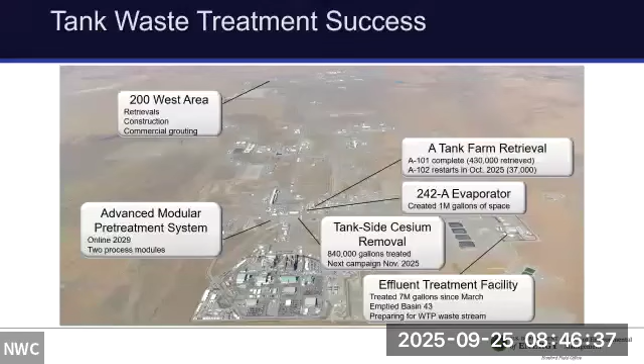So we started H2C, we started our contract in February of this year. Just to say who we are, we're comprised of three companies, BWXT, Amentum, and Fluor, with teaming small businesses of Longenecker and Associates, DBD, Intera, and a company called DSS Plus, which is a chemical management and chemical safety company. We've gotten off to a great start over the past 7 months.

Before I go further, I just want to say I've kind of swooped in here at the nth hour and get to be part of this great Hanford set of projects, being part of making the first transfer to the WTP plant and watching it start up. But my colleagues on the panel have been working at this for many years, and I'm just pleased to be part of it and see these great achievements come to pass. I think entering the next phase is a bit of an understatement.

I mentioned this yesterday, it's really, really history in the making, and it's just something that we all should be quite proud of. H2C's vision is to solve the Department of Energy's largest environmental challenge in order to create a positive legacy for future generations, primarily future generations within the Tri-Cities, our local community, which has been part of this evolution of Hanford for many decades. So we as H2C are extremely proud to be a part of it.

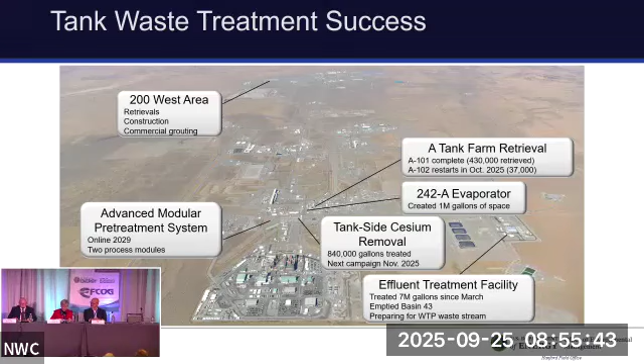Next slide, please. I want to talk a minute about our company values. In order to enable the nuclear culture for continuous operation, we've established what we call a values-based organization. That values-based organization tees off of 6 values that we hold near and dear, that we are growing organically through the organization and also institutionalizing throughout our various processes, performance management, training, et cetera.

Our 6 values are to live safely 24/7, own it, which is about accountability, commit to the mission, which is about why we're all here and what the government pays us to do, make it better, make something better every day, big or small, listen first, listen to our colleagues and our employees, and sometimes that's hard to do, but it's critical to the kind of culture we want. And lastly, to act with integrity.

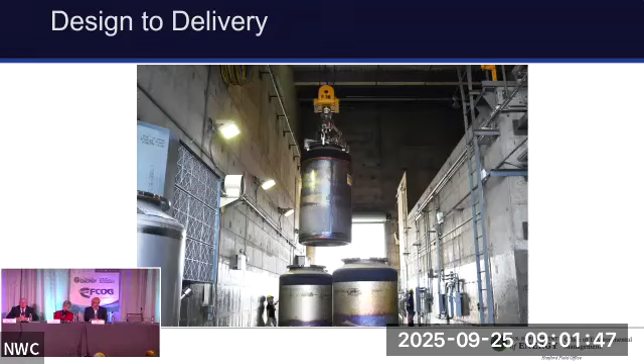So things we're talking about, you heard Carol mention safety. Well, safety is paramount to us, and construction is a very risky industry with our craft working in jobs that are very physical and dealing with equipment interfacing, picking, lifting, and rigging. So safety is paramount to us in how we execute our work and meet our goal of zero accidents, ensuring that our workers go home in better condition than when they came to work. That's something we're really striving to achieve.

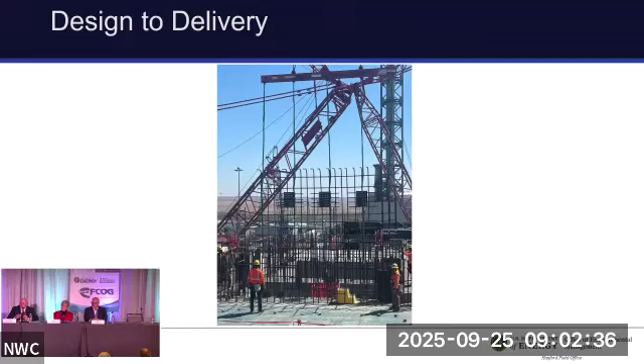We're also working hard to further accelerate the schedule and reduce costs. Our goal is to complete the design in early 2027, be underway with what we consider long lead or critical procurements, and then weather in the facility, which involves installing concrete at the upper elevations. You'll see rebar going in on the high-level waste facility at the upper elevations, installing the concrete, and if you look at the next slide, you'll see what we call an over-the-top piece of equipment.

A lot of that equipment was purchased in the early 2000s. It's been in storage, and we've been working on getting it installed in the facility. With over-the-top construction, we'll place concrete over that, and we have about 6,000 plus tons of steel to install, and then we'll cover and weather in the facility, all with that goal of early 2027.

So let me talk a little bit about how we're executing that. What we're really trying to do is what we call a new approach to HLW, and that is to reduce the cost of this facility and make it affordable for our customer, the Department of Energy, and the U.S. public. And how are we doing that?

Well, the key to that is the best way to reduce costs, and there are lots of factors, but when we're in what we call phase 2 of the project—construction, startup testing, and commissioning—every day you can reduce that saves a significant amount of money by reducing the hotel load. So we're really focused on how best to go about doing that.

So first off, we've shifted from a design-build approach to a design-then-build approach. Now that doesn't sound like much, but design-build is what we do very well on an LNG project where we're constructing very similar designs over and over, going from about 20% design to breaking ground, and then hitting substantial completion in about 50 months, with LNG coming out the back end of the plant. But this plant is much more complex than that.

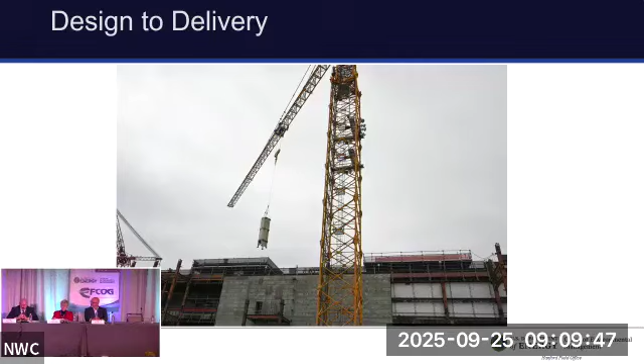So things are going well at HLW, and we really look forward to those proceeding. And with that, I will turn it over to Mark, who will talk about the lab.

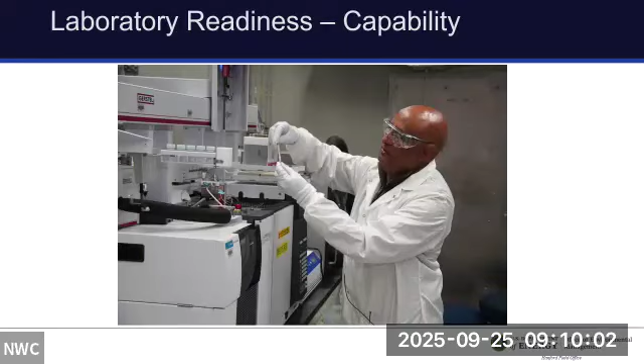I'm delighted to be here today to talk about the significant contributions of the 222-S laboratory to the mission at Hanford and how we got here. Starting out with a discussion about our company: Navarro-ATL is an unincorporated LLC formed by two businesses, Navarro Research and Engineering and Advanced Technologies and Laboratories International.

Our job as the primary contractor at 222-S Laboratories is to provide analysis of highly radioactive samples for the Hanford mission. You've heard a lot this morning about the exciting time we're in here at Hanford, and it is an exciting time. We're all anxiously awaiting the next step. We've had a critical and crucial role at the labs in getting us here, and I'm going to talk about that today.

I want to express what we're doing to prepare for the long-term scope and mission at Hanford. The 222-S lab provides laboratory analysis for the waste feed going to the waste treatment plant from tank farms. We also provide analysis for waste samples before and after tank retrievals, and for tank operation samples to ensure tank operations are safe and can be performed long-term.

We work very, very closely with DOE and Carol's team. We have to be in lockstep with Carol's team to make sure that what they need from us, we can provide, and we do that on a daily basis. We also work with all the other Hanford contractors to make sure we have what we need to get the job done, and we'll talk about that this morning.

It's an old facility, the Hanford 222-S laboratory. It's 75 years old. In fact, we'll be celebrating our 75th anniversary next year and making a big deal out of that. We've been out there a long time, but the labs need some work, as you might imagine—upgrades and renovations. We've been doing that. It is a Hazard Category 2 nuclear facility, so we need to make sure we maintain that level of rigor moving forward.

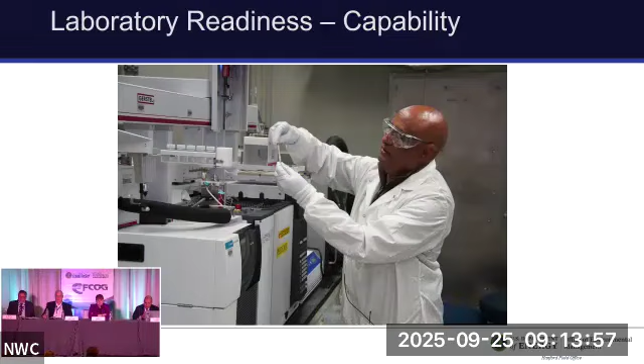Moving on to capacity, DOE is investing in the modernization of the laboratory. What you see in that photo is a laboratory that's been remodeled. If we had a before picture, you'd be amazed by that photo. We're really doing a great job there. As I mentioned, the lab is 75 years old, and not a lot of renovation or upgrades have been done over the years. So we're taking that challenge on head on, and we're proud of that.

In 2024, we completed a major hot cell window replacement. That was a huge project for us. We self-performed that, did it under budget and on schedule, with no contaminations and no injuries.

It's really important also to the mission to make sure we're ready for what's coming next. We're repurposing hot cells to expand our storage for tank samples and continuing to replace life systems as we move forward. As far as reliability, we're essentially de-risking the infrastructure to ensure 24/7 operations.

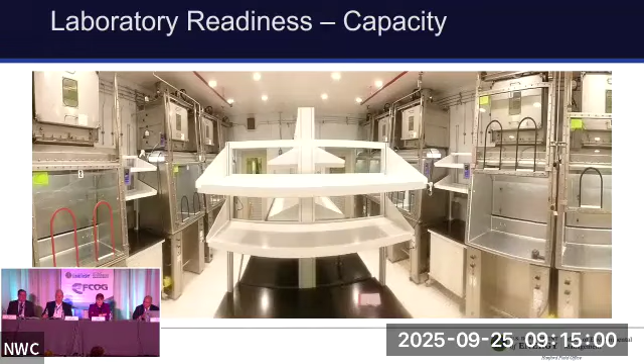This picture shows us using one of the more than 30 instruments we've upgraded and replaced in the lab so far. This is the X-ray diffraction instrument, which allows us to study the physical properties of samples we receive in a way we haven't been able to before. We have a lot of these new state-of-the-art instruments we're introducing to the lab.

By doing this, we've ensured proficiency test accuracy and decreased analysis time. Right now we're hitting a 98% average proficiency test accuracy, and if you're familiar with lab work, 98% is pretty good. We're pretty proud of that, and we're going to continue working to make that even better.

This means staying on top of our preventive maintenance and corrective maintenance as well. As you might imagine, keeping an old lab running is a tough thing to do, but we're making that work. We've reduced our corrective maintenance backlog by two-thirds over the past year, and for the 8th week in a row, our PM backlog is at zero. The importance of that is we've got to make sure this lab stays in great working order for now and in the future.

We can't do this alone. For many of our systems, like water systems and fire systems that we're having to upgrade, we rely on Amy's team quite a bit to help us with that, and she's been tremendous in providing that support. Some of our systems overlap with Bob's area of responsibility, so we have to work with his team to make sure we can access those systems and get those upgrades done. As you've heard throughout, this is a team effort by all of us, working hard to make sure we're ready for what's next.

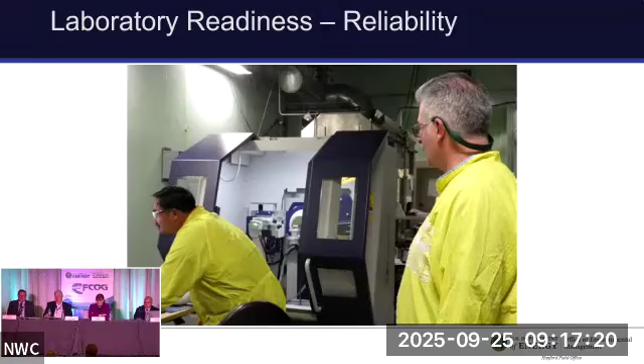So we like to say we're building the lab of the future. Stay tuned and you'll hear more about that. And with that, I'll turn it over to Bob.

All right, thanks, Mark. I'd just like to note up here that this end of the table was the bald side of the table. Carol, apparently you got a new haircut you got to get, right? Mark and I came this morning with a fresh haircut, ready for this event. Or I got to change my name to Johnson. I don't know what it's going to be, but Carol recommends Johnson maybe. I don't know.

So as Mark mentioned earlier, we are the back end of the process for everything associated with vitrification activities. I call it hot potato. We'll take the canisters when they come over to us, receive them up on the upper platform area, let them sit and cool off until they're no longer a hot potato, and then we'll move them down into our final storage resting location for the foreseeable future, until the final destination is determined at some point later on, way later in the future.

So for us, it's right at the final throes at the end of the campaign. We've been ready for about the last 9 months to receive those, interacting with mock-ups with Mark's team to make sure everything transitions easily as they come out of his area once completed, and we're geared up and excited to get started. It's been a long time coming for all of us. Mark started here in '93, I think I started in '92, so we came out around the same time. Both of us had hair then, neither one of us do now.

Yesterday we had a panel up here, and I mentioned this is a next phase of Hanford. Although this is a massive step associated with tank waste, we are still doing massive things in other areas. One area we're responsible for, and just now getting to the precipice of, is going through our second readiness review with the Department of Energy's approval for starting up cesium strontium capsules.

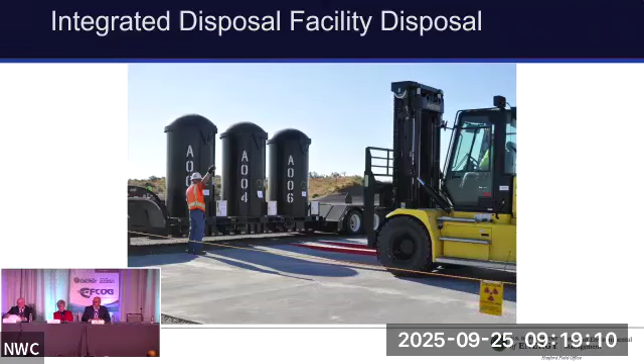We are planning to start loading cesium capsules as early as right around the Halloween time period, and for the better part of the next 2 years after that, we'll be removing all of the cesium capsules currently in wet storage up to a dry storage location. As Ray mentioned yesterday, I think 60% of all the cesium on the Hanford site resides in those capsules, so they are a significant risk.

On top of that risk, once we complete the cesium campaign, we have some strontium capsules we'll move out either to dry storage, or there's some commercial interest in that, should DOD and DOE decide to move forward. In about a 2.5-year time frame, that will free the facility up to start the longer term D&D part of the campaign for the Canyon facility, allowing us to start offloading the current costs of managing a facility of that nature, about a $30 million price tag per year that we would free up.

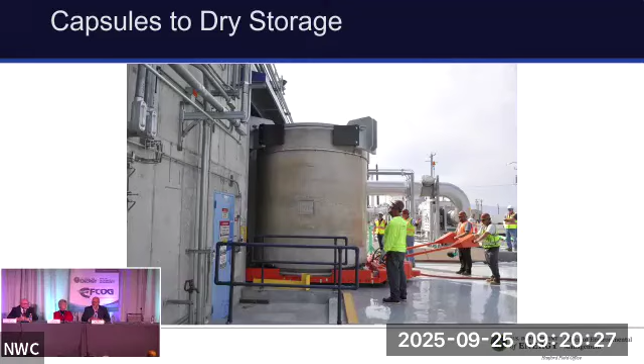So we're excited to get rolling with that. It's a significant step that's been in the making for about the last 8 years, getting things lined up and ready to remove those items and move them out of there. So a great step forward for us.

Speaking of momentum, speaking of the next phase of Hanford cleanup, one of the things Hanford always touts is that they treat about 2 billion gallons of groundwater per year, and we're over that 2 billion gallons again this year. But where the focus has really shifted over the last few years is not the volume of liquid being treated for groundwater, but really the mass being removed, the chemical constituents, the radioactive constituents being removed from the Central Plateau, from the river corridor. That's been multiple years, a decade or more, in the making.

Where we're at today is we're doing some rebound studies along the river corridor area, with the intent to demonstrate that we've actually cleaned up all those constituents around the river corridor, and now we're really just focused on the Central Plateau, the 200 East, 200 West area, along the picture that Carol showed earlier, looking east to west, where most of our efforts are going on.

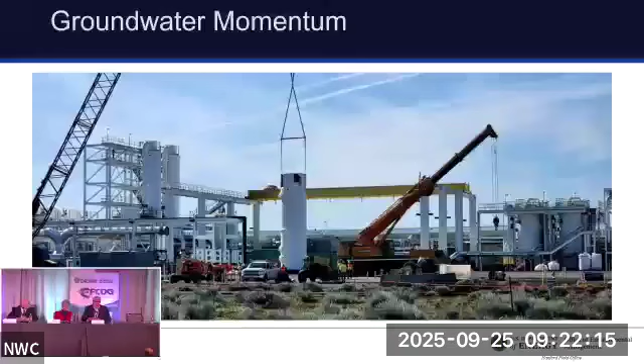We've been so successful in our groundwater campaign along the river corridor and ultimately up on the Central Plateau that we were able to identify, through the course of this year, an opportunity to pause or stop some well drilling activities for a couple of other plumes that we don't believe we may need to do, because we've had such great success. That freed up some of our money through the course of this year.

We moved some of that money over to activities we're planning for next year, moving into the WRAP facility complex and the 2706T facility. Those of you who don't know, the WRAP complex is what used to do contact-handled transuranic repackaging activities when we first started at Hanford. That facility has degraded over time, and we're eventually going to demolish it and build an alternative process to do that treatment.

By shifting that money over, this next year we're going to be able to take that facility to what we call a cold and dark state, meaning we take the authorization basis and regulatory requirements, isolate the glove boxes, control contamination, shut the electricity off, and ultimately shut the fire suppression system off—which is going to save us about $10 million a year in annual costs we don't otherwise need to spend. So having so much progress in groundwater has allowed us to free up money to go approach other areas.

Additionally, with that kind of spend-and-save approach, one of the things we've really been able to accomplish is continue to divert some money over to the K area.

I just mentioned all that progress along the river corridor for groundwater. K West area is really the last remaining river corridor area, minus the 300 area 324 facility. When we finish up K area, that will allow us to make a culture shift to really start shrinking the footprint, allowing all of Hanford to focus on 200 East and 200 West campaign activities.

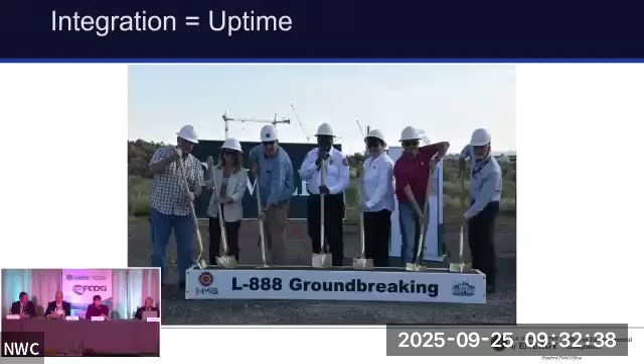That barely touches the cusp of the integration activities we spend time on together literally every week, making sure we know how we're going to move the mission forward.

Besides utilities and the crane pool, a couple other areas I want to highlight that are really important for us is the joint success. I tell my team, and we believe it every day, that their success is really our success as well. So how do we continue to innovate?

Carol mentioned they've been on site since the February timeframe. Many of the employees we've worked with for many, many years, and I've had the pleasure of knowing Carol as well for many years. So it really is a joint effort to figure out how we be innovative together. There's an approach that says when you're teaming and partnering together versus hitting each other in the head every day, it really can move the mission forward in a much better and faster way.

So we're continuing to share those types of items, some pieces that kind of get lost in the fray for what we provide. Our goal is to take out of these individual companies some of the distraction activities they may not need, things like how is your road getting plowed to get your 2,000 employees to work today.

We're going to do that for you. How are you going to pay your people? We're going to do that for you. How are you going to clean 300 facilities? We're going to do that for you. Those are the things that, again, we're not operating in the high hazard operations areas as these folks up here are. We're really trying to take the day-to-day business-oriented functions out of their way so they can focus on their high-hazard operations, and that's what we provide and integrate with them on.

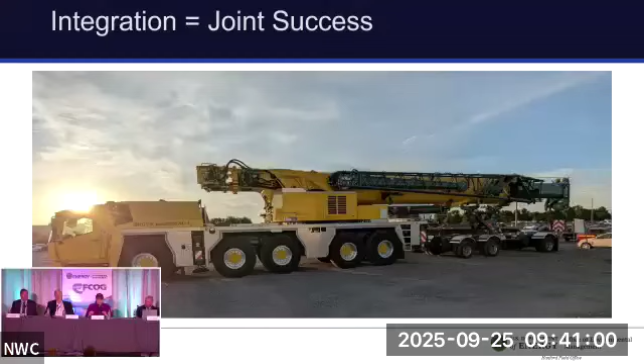We are pretty successful with our unions at using temporary employees. So if I see a significant uptick in a specific craft that's going to be sustained over a period of time, I can go utilize temporary craft people to help fill that gap. So there's a lot of detailed integration and activities that take shape, all in the effort to support these projects and have them be effective and efficient in their missions.

We actually implemented at the Hanford site what's called HAL, the Hanford AI Liaison, a tool that's now been deployed out to the whole site to use, and it's quite amazing. It really allows us to use a ChatGPT AI type model, but it is secured within the Hanford intranet. It doesn't learn, it doesn't send things outside of the Hanford intranet, which was able to get through the security posture that we needed. I heard yesterday a few different areas where people were looking to leverage AI similar to what we're doing, procedures as an example.

At HMIS, we have over 600 procedures. Somebody asked me the other day, at an all managers meeting, Amy, are you compliant with your procedure set? And I said no. And I had people literally about lose their mind. Amy, how can you say you're not compliant? I said, it's impossible for me to be compliant with 600 procedures. So we're using HAL to help us reduce that level because we know we have some level of duplication. So that's just one area.

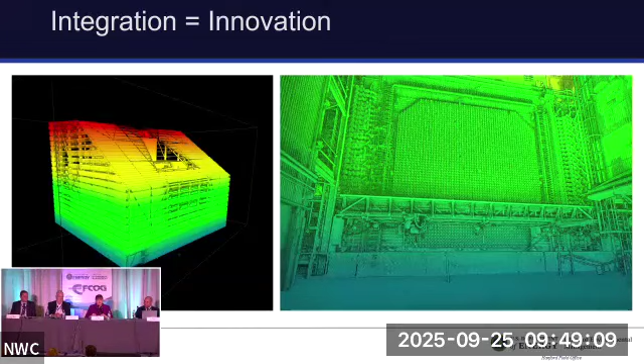There is rarely a week - I can't even think of when the last week would have been - that I do not have a conversation with every single person sitting here on this panel. That is just how we have elected and chosen to operate the One Hanford mission at Hanford, because it is a high hazard operation. It's important to our community, and it's important to the ultimate EM goal of cleanup. So thank you.

So just quickly, I'd like to thank the Hanford contractors for the progress they're making and for their willingness to work together as a team to make the projects go smoothly. So thank you.

Dave? That was a lot, huh? There's a, I don't know, maybe you might say that the Hanford site is sort of like the Broadway of the cleanup world. If you can make it here, you can make it anywhere. I don't know.

And the reality is that they really just sort of scratched the surface. There's so much else that's happening, getting ready to stand up the true repackaging and shipment. Bob briefly mentioned the 324 building, but there's a lot more going on. So appreciate that panel and all those descriptions of much of the work that's happening.

We have probably time for a couple audience questions if there are any. I see Commissioner Delvin from Benton County has already put his hand up. Commissioner, there are a couple mics, or if you just want to project.

Yeah, I'll address it. On the 324 building, we're making great progress. We actually awarded 2 vendors here recently in the last couple of months that are coming out to do both fixative fogging and some grouting evolutions to stabilize the facility itself, as we continue through the regulatory process to get final approval to go the alternative path of tearing the building down and digging the waste site up. We'll be inside that facility doing stabilization and preparation activities for the demolition for the better part of the next year, year and a half. But we're right now about 4 months ahead of schedule where we need to be. So good, steady progress, getting things fixed inside that facility and making sure things are characterized.